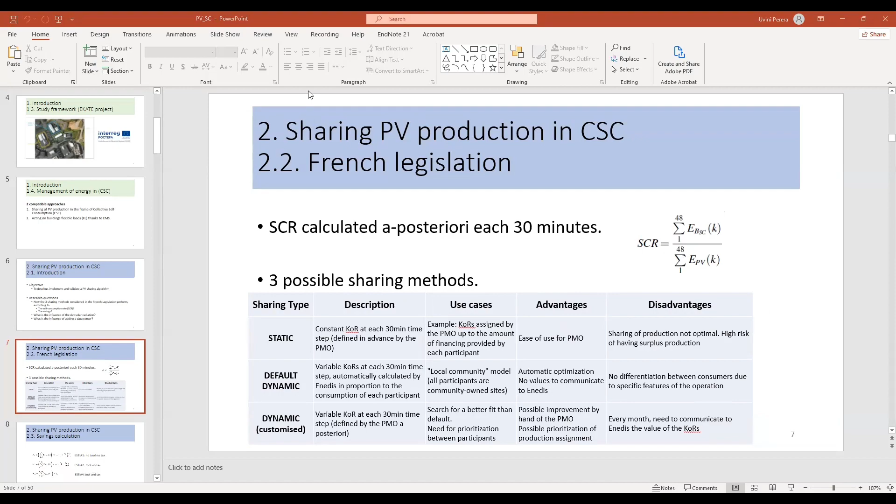Then we have tested these three different sharing methods, and for the customized dynamic sharing, the interest of defining rules in order to have the best savings. Regarding the calculation of savings, of course, we take into account the price of the electricity bought from the grid, and also the cost of the electricity by grid, and also the price offered by the manager of the grid for the excess photovoltaic energy of the collective self-consumption.

But there are especially two concepts that have to be taken into account: the toll and the taxes. If the energy that is produced in a building is consumed in another building using the local distribution network, then we have to pay tolls. And if the PV panels are owned by a company and the consumption is carried out by another company, then it has to pay taxes as well.

Okay, in this case, in ESTIA 1, we do not have to pay toll and tax because the panels are owned by ESTIA, and the production is on the roof of ESTIA 1. In ESTIA 2, we have to pay toll but not tax, and in ESTIA 4, we have to pay toll and taxes.

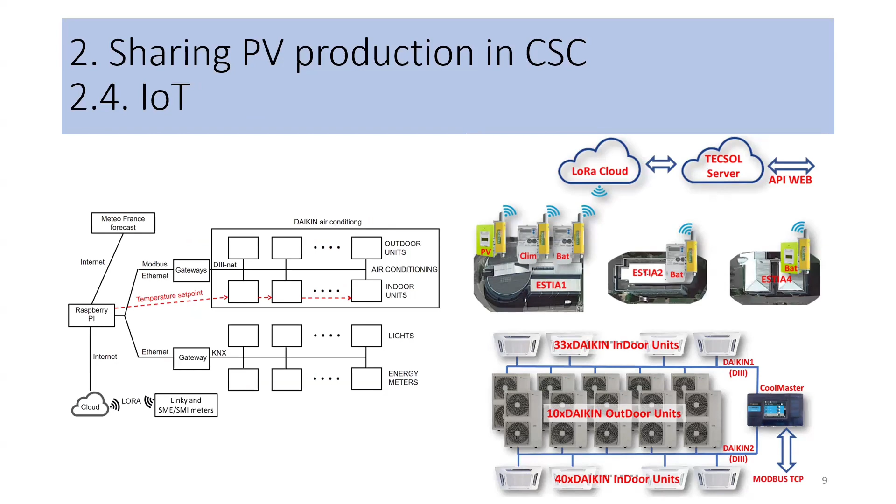Then some IoT was developed and installed for both approaches to communicate with different sensors, smart meters, etc. Here you can also see, related to the second approach, the HVAC system installed in ESTIA 2, where there are 10 external groups, heat pumps, and 73 indoor units.

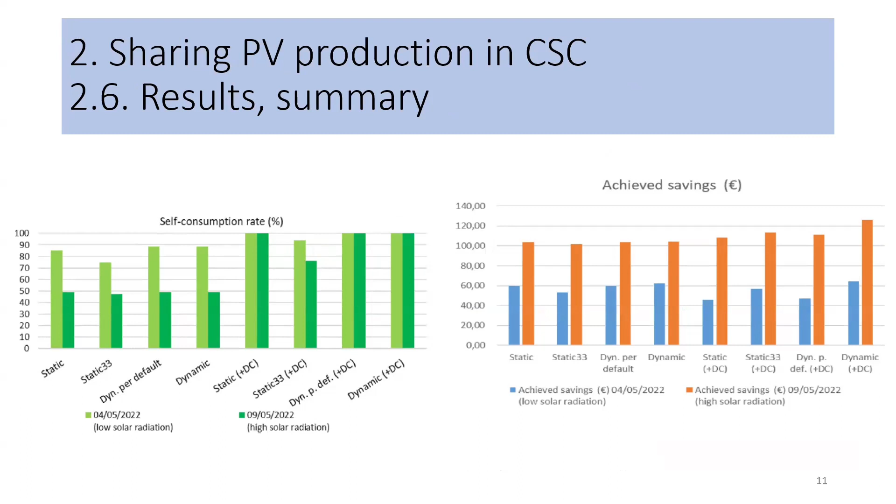And the structure of the EMSs was this one. The inputs were the external temperature, the solar radiation, the indoor temperatures, the PV production, and the building's consumption. And the output was the set point temperature of ESTIA 2 and the on-off state of the indoor units.

Then, regarding the rule-based EMS, the objective was to develop and validate a rule-based EMS in Izarbel Technology Park, trying to obtain the best self-consumption rate, and of course also respecting the comfort of the users of the building.

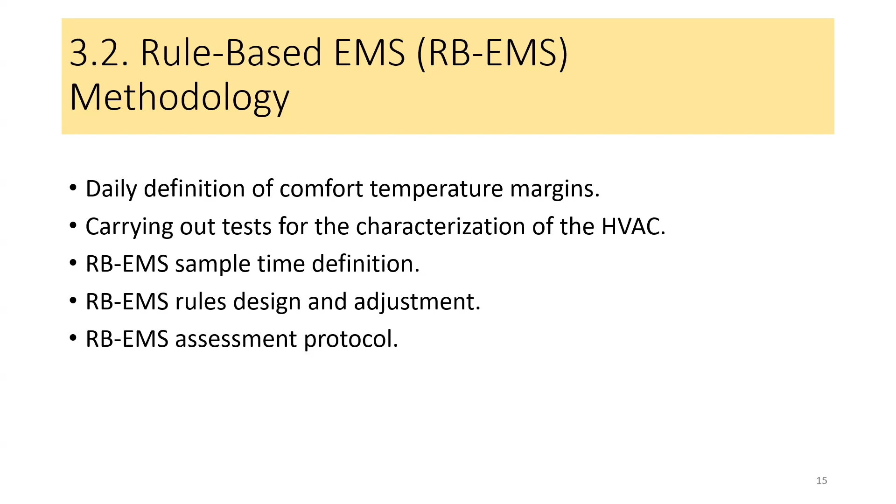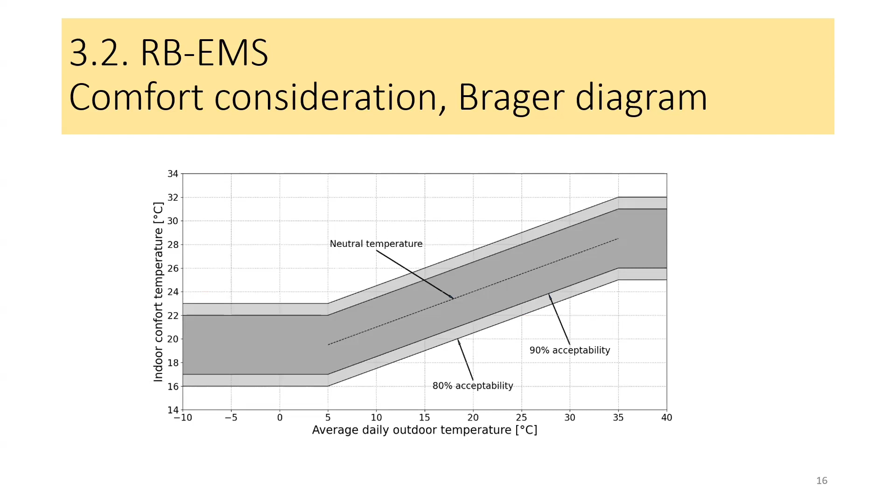Okay, then the comfort was defined thanks to the Brager diagram, which takes into account the external temperature of the preceding day, and then defines the comfort with a 90% acceptability or 80% acceptability. We carried out this kind of test. Here on the left, you have 5 indoor units of a room, and on the right, the corresponding external group. And we made some conclusions from there.

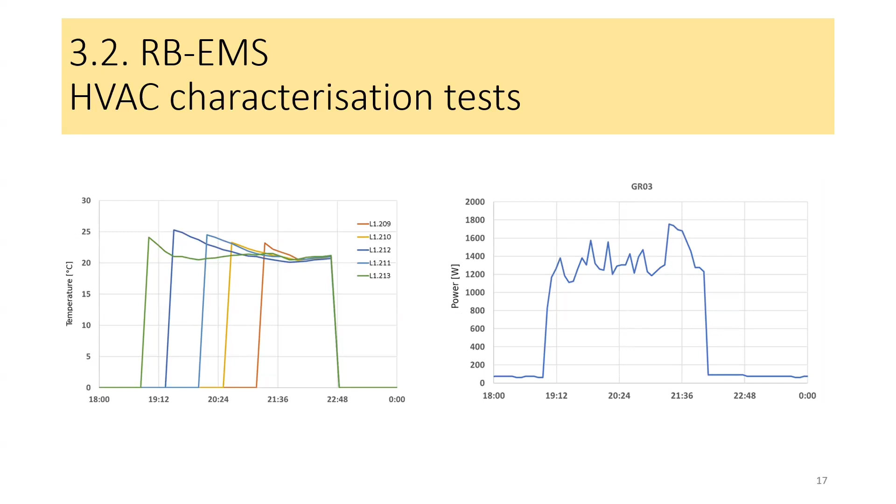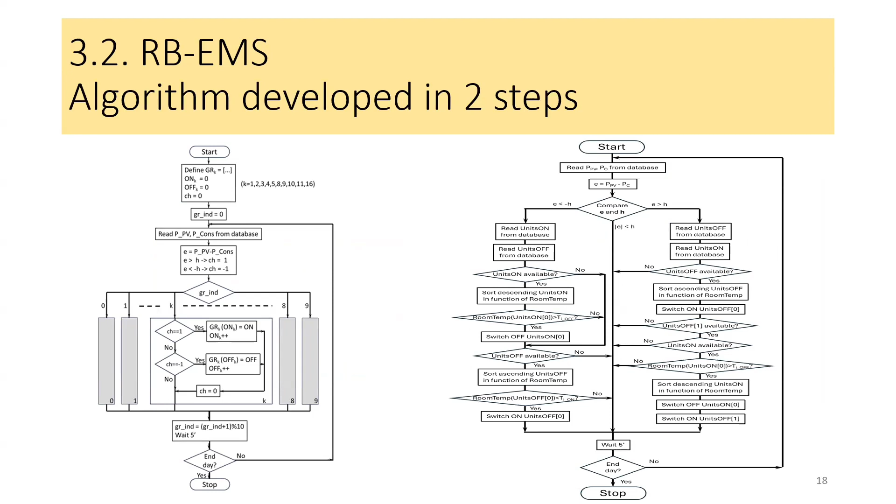For instance, when a new external group was switched on, and the difference between the set point temperature and the indoor temperature was between 3 and 5 degrees, the variation of the consumed power was more or less 2 kilowatts. We also have other conclusions that allow us to define the rules of the rule-based EMS in 2 steps. First, we didn't take into account the comfort. The objective was to see if the consumption was able to track the production. And in the second rule-based EMS, we considered also the comfort.

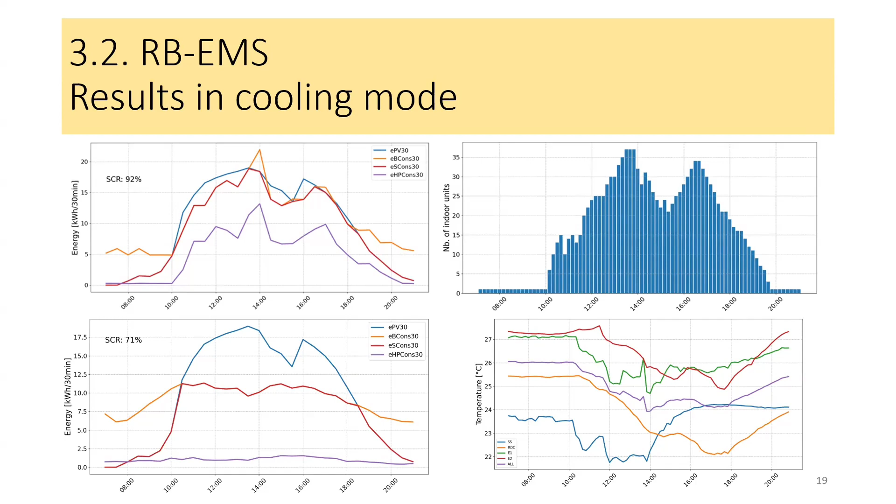Then with the protocol I've mentioned, we can compare the result we would obtain with the rule-based EMS, and in this case we would obtain a self-consumption rate of 71%. Even here, if the objective was not to ensure the comfort, we ensure 80% acceptability comfort. In the second test, the rule-based EMS control was operating in heating mode, it was in winter, and we obtained a self-consumption rate of 89%.

Here you have the temperature in each floor. You can see that in the fourth floor, that is just under the roof, we overpass the 90% of acceptability. It was our target that all temperatures were inside the 90%. But of course, as the heat pumps were working in heating mode, we couldn't cool that. And this was because of the effect of sun on the roof.

And we can see also that in the first floor, which is partly underground, the temperature was very, very cold sometimes, 17 degrees, but it's the temperature given in the 90% of acceptability by Brager. It's true that Brager is maybe not a good model for this case, because this building is rather humid. Then we should update the Brager diagram a bit to obtain a minimum temperature a bit higher.

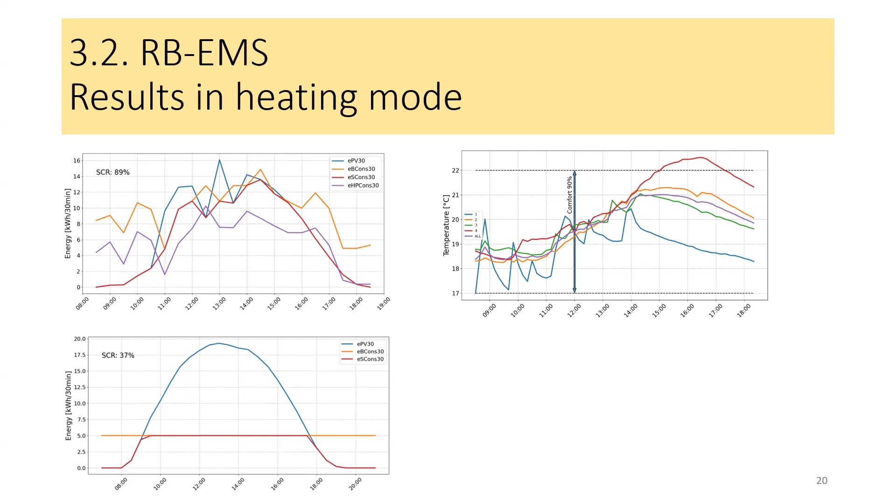And comparing with, yes, here I don't have the figure related to the protocol I've mentioned, but in general, in winter, the consumption is much higher than this one. Then, in this case, the self-consumption rate that we would obtain in a workday would be 100%, but with less efficiency, because the consumption would be much higher. And if we compare the results obtained with the rule-based EMS with the result we would obtain if the rule-based EMS was not operating the same day, the self-consumption rate would be 37%.

Then in conclusion, we obtain a good tracking of the production. We respect the user comfort according to the Brager diagram. We improve the self-consumption rate in summer, not in winter, because in winter users can use individually the thermostat of their office, and then consume more energy. But thanks to the rule-based EMS, in winter we have a better efficiency. And now we are working on a publication with also the participation of Ramon.

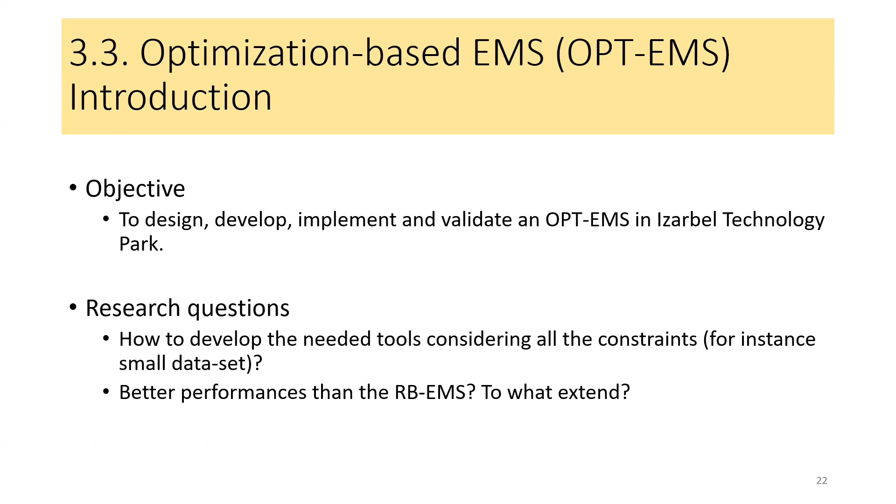Regarding the optimization-based EMS, the objective was to design, develop, implement, and validate this EMS in the Izarbel Technology Park. The research questions were how to develop the needed tools for that, considering the constraints we had, and we wanted to know if this EMS would be better than the rule-based EMS, and to what extent.

Here you have the functional diagram of the optimization-based EMS. The recovered data are cleaned and processed, and are used to train machine learning models in order to predict the PV production and the building consumption 24 hours ahead. It is set up for the 24 hours of the next day, with a sampling time of 1 hour. The difference of these two curves gives the gap we should try to fill with the consumption of heat pumps.

And then we developed a building thermal model and the HVAC model, so that the optimization model can, using the difference between the PV prediction and consumption and this model, decide for the next day what temperature set point to apply to the STR2 building.

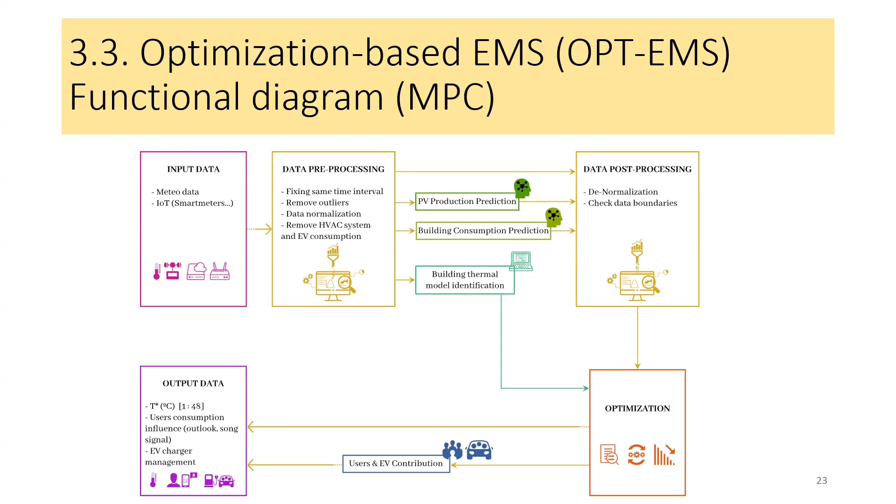Okay, then one of the tools we had to develop was the consumption forecast model. The constraint was that this work was done during COVID. The IoT installation was new, and during COVID there was some lockdown. There was no consumption. You can see here in this curve, sometimes the consumption in STR2 was nearly zero. And moreover, as said before, each user in this building can adjust the temperature in their room, so the behavior of the heat pumps' consumption is rather chaotic.

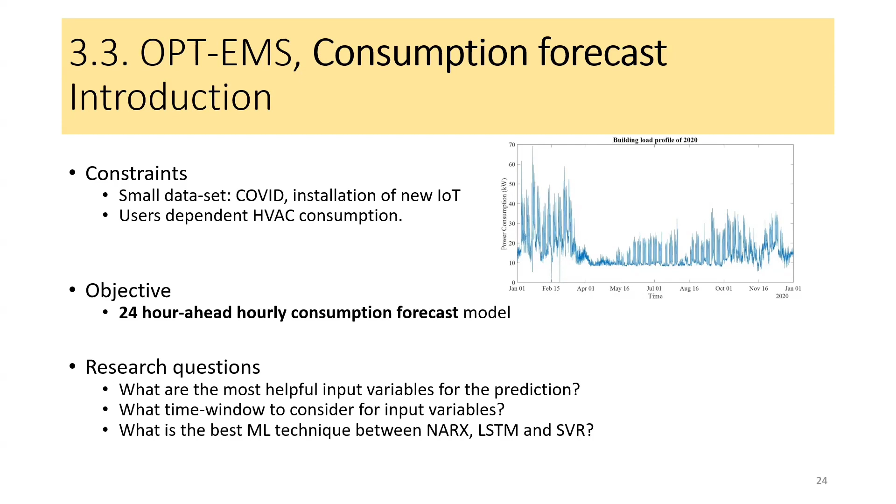Then the objective was to obtain the model I mentioned before, and the research questions were: what are the most helpful input variables to obtain the best forecasting? What time windows to use regarding the input variables, and what would be the best machine learning model between NARX, LSTM, and support vector regression?

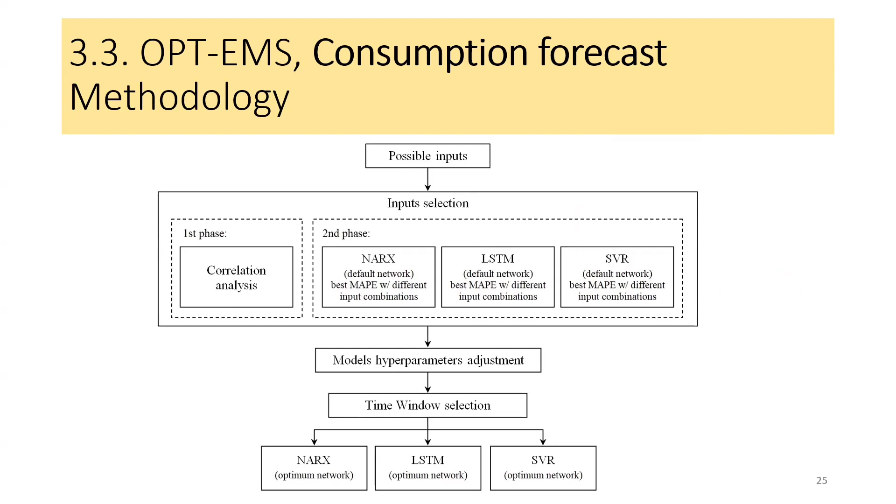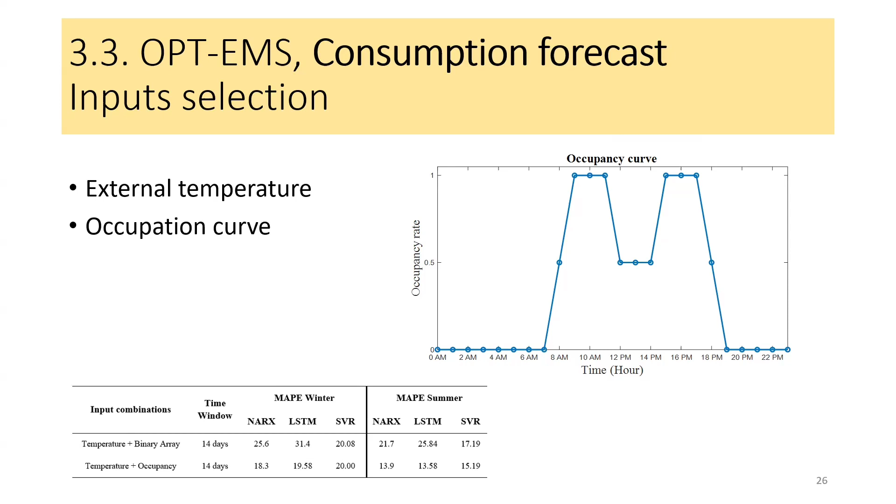The methodology was this one. In 2 steps, we chose the input selection, then we adjusted the model hyperparameters. Then we selected the best time windows, and we carried out the prediction with the 3 obtained models. Regarding the input signals, we saw that the best input signals to consider were the external temperature and this occupation curve we created according to the information we had about the occupation of the STI2 building. Of course, this occupation curve on weekends and holidays is 0. Yeah?

Regarding the time window, we saw that the best trade-off was to consider a 2-week time window for the input variables. And these are the results we obtained. Considering the rather chaotic behavior, we were rather happy obtaining these results. With the metrics, the NARX performs 26% better than the LSTM and 21% better than the support vector regression.

And this can be explained. The NARX is a recurrent neural network, and it's able to catch the dynamics of the system. The LSTM also, but LSTM is normally fitted to work with big data sets. In this case, we were working with a small data set because of the constraints I explained before. And the support vector regression is not a recurrent method. We saw also that we obtained better results in summer because the HVAC was less used, and then the consumption signal was less chaotic. We also have a publication here for people that would be interested.

Then another tool was the PV production forecast. The constraints were similar, with a small data set because of new IoT and PV panels. And the objective was also to forecast the 24-hour-ahead production of the next day. We developed this work in 2 steps. In the first step, we trained the models with measured data, especially measured solar radiation. And in the second, we used the solar radiation predicted by some meteo agencies.

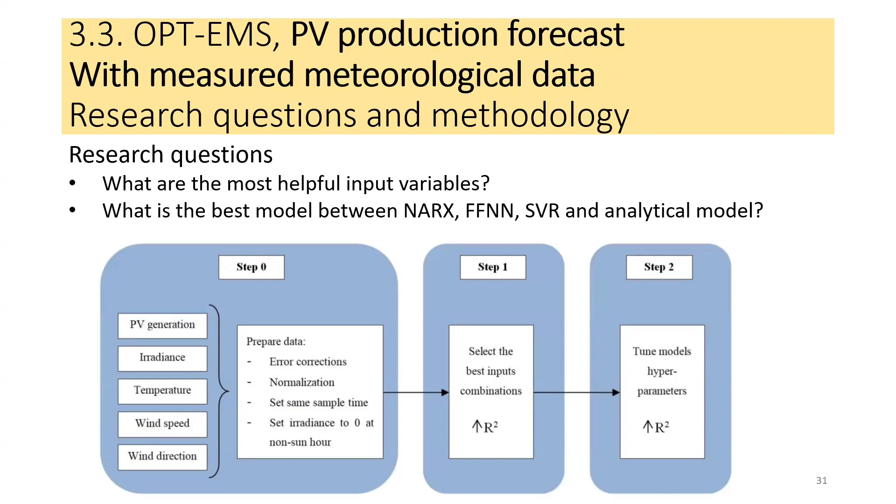Then the research questions were what are the most helpful input variables, and what is the best model between NARX, feed-forward neural network, support vector machine, and an analytical model. The method was similar. We saw that the best was to consider only the solar radiation as input.

Then here we saw that the support vector regression had, as the feed-forward neural network, another input. It was a time vector, and then it performed 4.07 better than the feed-forward neural network, 5.12 better than NARX, and 4.18 better than the analytic model, according to the R-square metric.

Here, the NARX was not performing so well. We think it's because it's recurrent, and the relation between the solar radiation and the production is nearly algebraic. The dynamic is very, very fast. That is maybe the explanation of why we obtained worse results with NARX. Here we have also a publication in Applied Sciences.

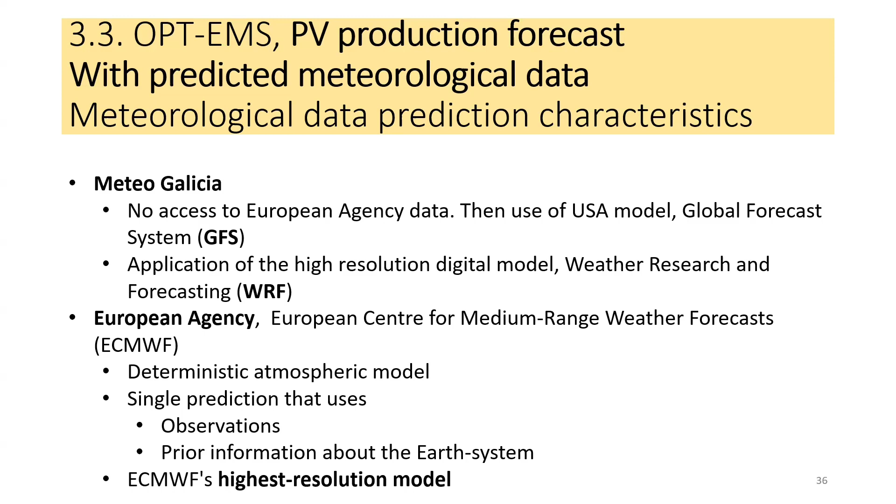And we use also data from a European agency. It's a deterministic atmospheric model, and it proposes a single prediction that uses observation and also prior information about the Earth system. It is known as being the highest resolution model.

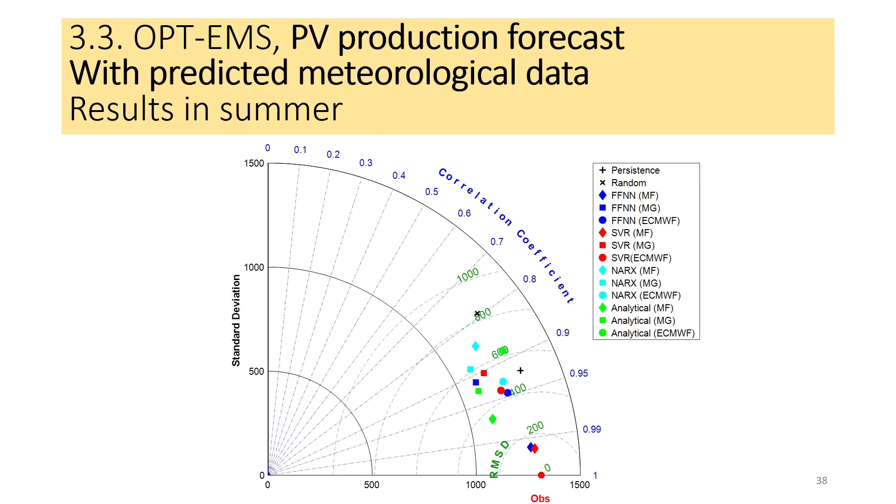Of course, for the model predictive control, we can only use the models related to Meteo Galicia and the European agency. The best results are those nearest if you trace a straight line between the observation and the point, the smallest distance between both points. And we can see that the best results are obtained with the European agency data and with a feed-forward neural network in winter and again here in summer. These are the results obtained with time series for the different machine learning techniques.

And then in conclusion, we can say that the European agency data lead to slightly better results, that the machine learning models are able to partially compensate the errors of the solar radiation prediction from the mentioned agency, and the feed-forward neural network, which is the simplest neural network, leads to the best performances.

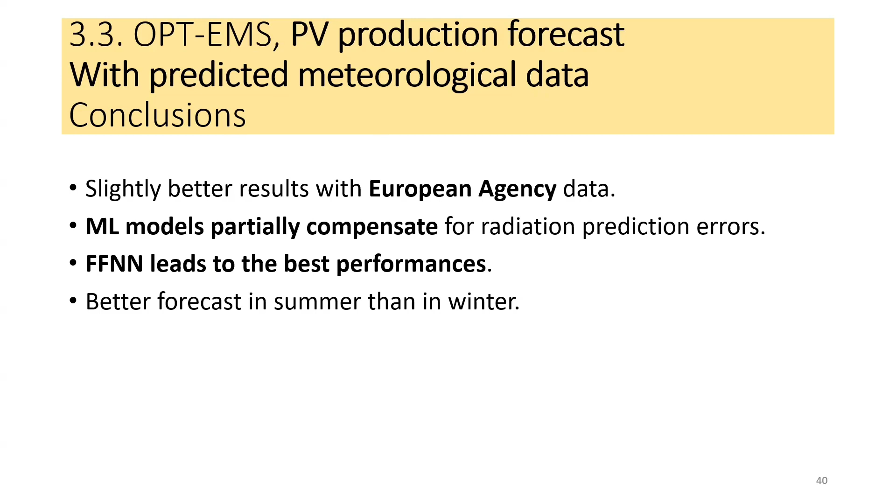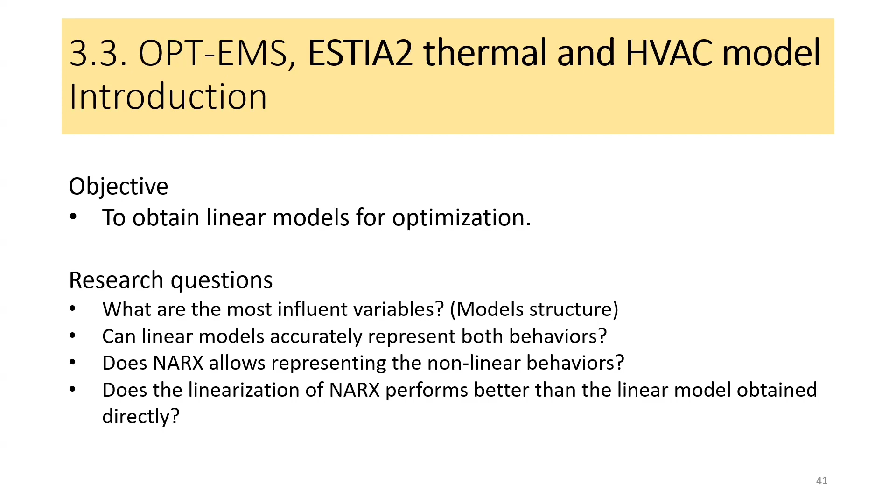Then, to finish with the tools we have developed, I will speak about the model we obtained for the thermal behavior of the ESTIA2 building and the associated HVAC system. The objective was to obtain linear models to use them for optimization later. The research questions were: what are the most influential variables? Can a linear model accurately represent both the thermal behavior and the HVAC behavior? Does NARX allow representing the non-linear behaviors? And does the linearization of NARX perform better than the linear model obtained directly?

For that, we had to excite the HVAC. First of all, we carried out tests on Sundays and weekends, because we couldn't perturb the workers. We carried out the first test with the step response, which allows us to know the settling time between the set point temperature and the indoor temperature. Thanks to that, we chose the sampling time to carry out a test during the whole weekend, and we created a pseudo-random binary signal that we applied to the set point related to the heat pumps, and we carried out this kind of test on 3 weekends.

We used the first data set, the first weekend, to train or identify our models, and the other 2 data sets to validate or test the obtained models. Of course, after the data cleaning and processing, we first obtained the linear model by identification, and then we trained the NARX model.

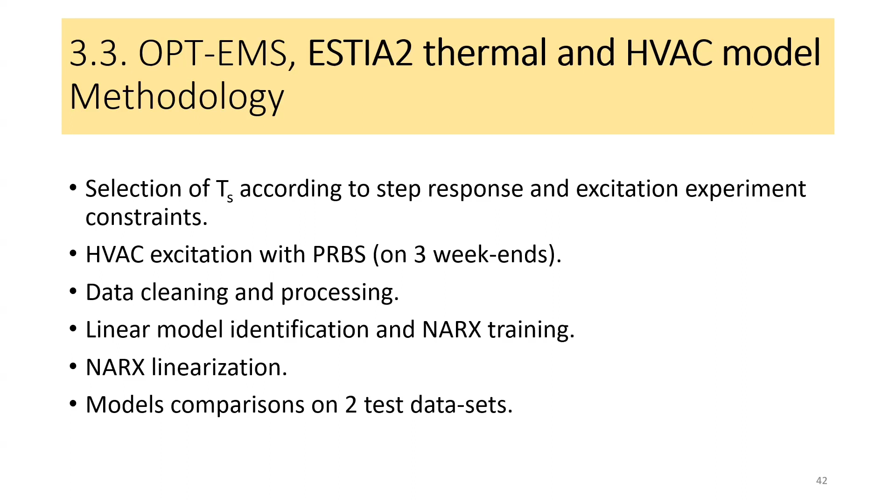Then we obtained the linearization, some linear equations, thanks to the linearization of NARX, and we compared all models in the above-mentioned two test data sets. Then we have two equations. The first one is related to the thermal behavior. Here, the output of the model is the indoor temperature, and the inputs are the external temperature and the

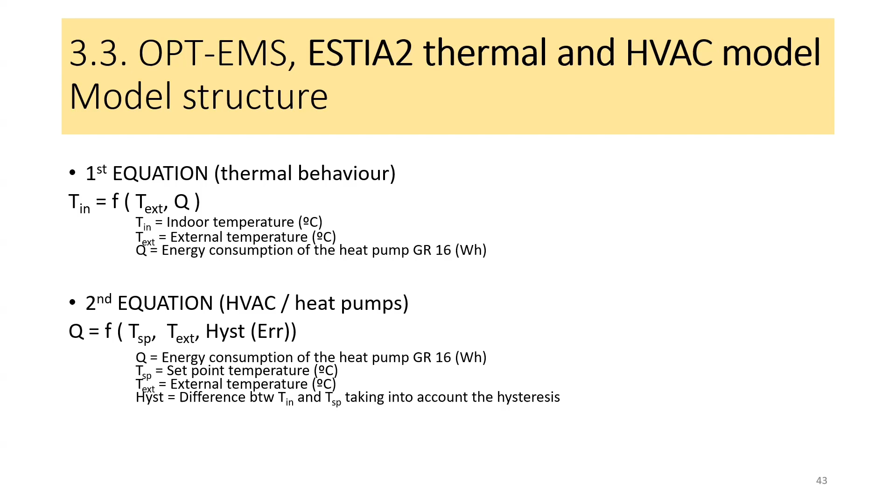heat pump consumption. And in the second equation, the output is the heat pump consumption, and the inputs are the set point temperature, the external temperature, and the hysteresis of the error between the set point temperature and the indoor temperature. These are the results of the first equation. We can see here the metric we have used is the fitting metric. You have the corresponding

expression here. And yes, we obtain good results for this first equation with the first data set for test 1, and also with the data of the third weekend. For all cases, the NARX that takes into account the nonlinearity, the linear NARX, and the Box-Jenkins model, that is a linear model obtained by identification directly.

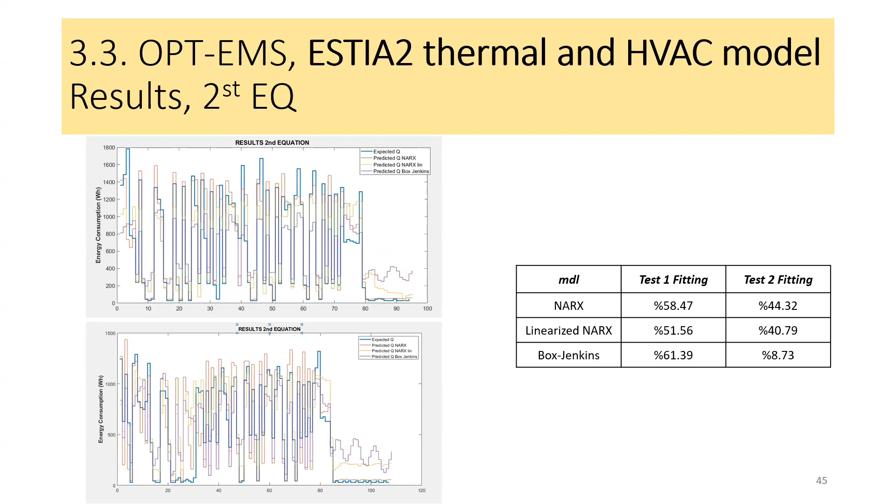Regarding the second equation, that was much more challenging because the variations are a bit chaotic. We obtained good results with the first test data set, but in the second data set, the results were a bit worse, especially for the Box-Jenkins model. Then in conclusion, we show that it was very important to consider the hysteresis of the error between temperatures as input, and that the NARX model performs very well in both tests.

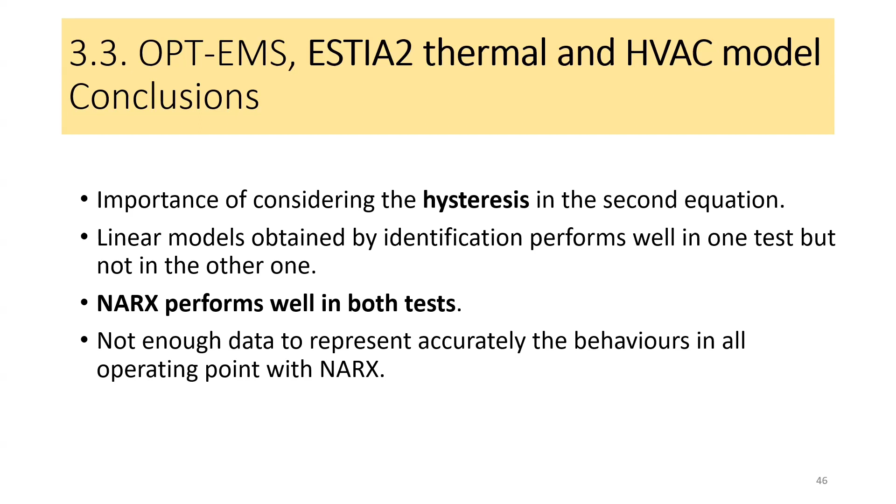Then now we are working. Here it's first in conclusions, yes, because I have not spoken about the optimization model here. It's because we have not finished working on that. Then as conclusion, we can overall say that we validated the PV sharing in the real system, and also we developed and validated the rule-based EMS with heating mode, and we validated also all the tools needed for the model

predictive control. And regarding future works related to ICATE, now in another project, named Consumadim, that means in Basque intelligent consumption, we are carrying out the completion of the optimization. We are waiting also to have a good day to validate the rule-based EMS in cooling mode, and we hope to implement it next month and validate the MPC, model predictive control EMS, in the collective self-consumption of ESTIA.

And to finish, again with the future works, we have got new funding from the European Union in the frame of the Interreg POCTEFA program. The name, the follow-up of ICATE, is ICATE Plus. And there we will focus on other flexible loads such as electric vehicles or industrial flexible loads, and will deepen the tools we have developed with new concepts or hybrid techniques. Then we will recruit two PhDs in some months regarding this project.